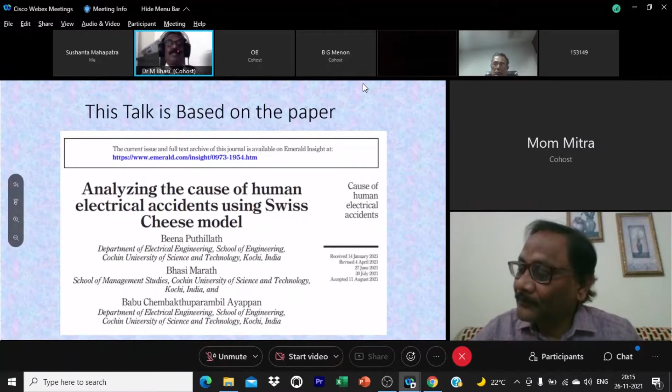Let me just take you through the background, though it is known to you, just to till the soil before you sow the seed. Accidents have been a major concern for a very long time. Though in earlier days, accidents were always attributed to the zone in which it was involved. I repeat, when you study accidents, you just focus on the zone where the accident occurred. Now, accidents are understood to have deeper and wider causes, even covering practices in society and industry.

Studies on electrical accidents reported in literature have mostly focused on the causes in the proximity of the accident and most of them have not taken a wider view of the phenomena leading to the accident. In industrial situations, even the causes of the accident in the proximity of the site and time were not in the control of the people there at that time and place.

I repeat, when the accident is taking place, the things which happened there were not within the control of people there. So just by studying things in the proximity, which people at that point of time could not control, it will be difficult to bring accidents to very low levels. Decrease of accidents can happen, but eliminating accidents, or bringing it like we did in quality management, zero defect, zero accident, bringing it to those levels will be difficult.

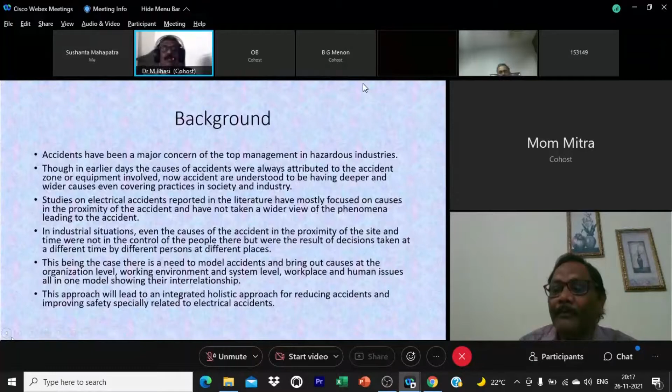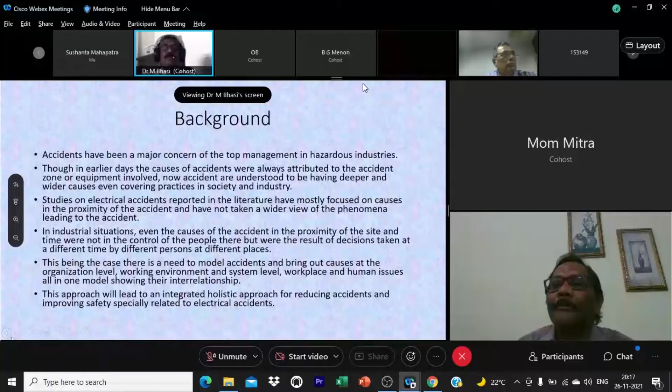Because many things that happen there were a result of decisions taken at a different time by different people at different places. This being the case, there is need to model accidents and bring out the causes at the organization level, working environment and system level, workplace and human issues, all in one model, showing their interrelationship. This is the thought which led us to this work. So we are trying to understand and depict the causes of electrical accident at these multiple levels, not just the causes which occur in the proximity of the accident.

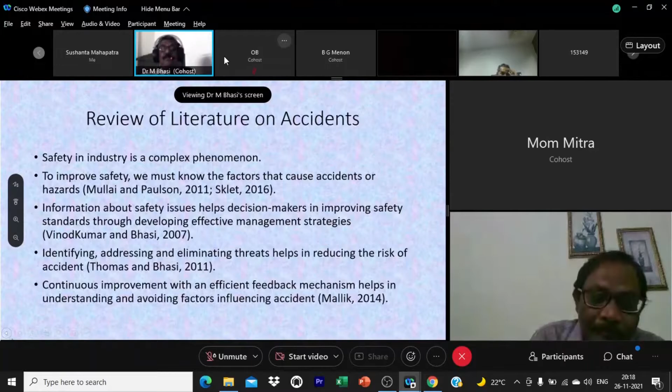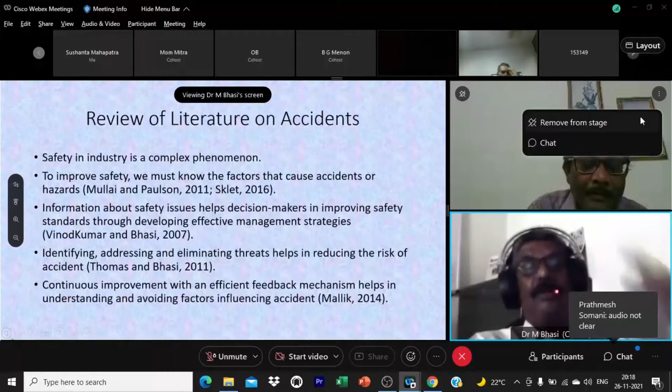A review of literature with this focus revealed that, first, safety is a complex phenomenon, no doubt about it. And the approach which has been used from long back to improve safety: we must know the factors that cause accidents or hazards and try to act on them. Information about safety issues helps decision makers, meaning if safety issues are studied and information is generated, it helps in improving safety standards to developing effective management strategies.

Identifying, addressing and eliminating threats helps in reducing risk. Then continuous improvement, an efficient feedback mechanism in this area helps in improving the system and reducing accidents. So the philosophy of TQM and that type of philosophy applies here also. You have to continually improve and not just get satisfied with one.

There are many theories which explain, which have been used to model. And I saw a recent paper, which is an excellent paper and has discussed accident causation models for 100 years. This is a very good point to start with. Let us look at some of the theories. We have selected certain theories not based on importance, but based on suitability for our thought process. That is hierarchical arrangement of causation.

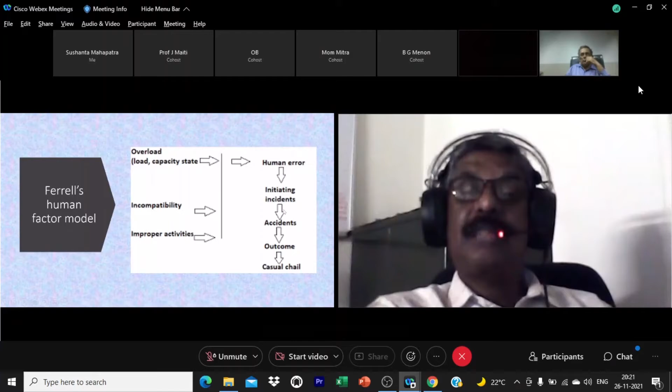Then there is Ferrell's human factor theory, which again just spreads out the whole factors there. It looks at overload, capacity, incompatibility, improper activities, resulting in human error, initiating accidents. Accidents happen, outcome is there, and causal chain is there.

Focusing on the human factor. There is also Petersen's accident-incident model. The accident-incident model covers causes and subcauses for the unsafe act and unsafe condition. So we divided the whole thing: both unsafe act and unsafe condition are necessary for an accident to occur. An unsafe act in a safe condition will not result in an accident. An unsafe condition without an unsafe act, again, the accident doesn't happen.

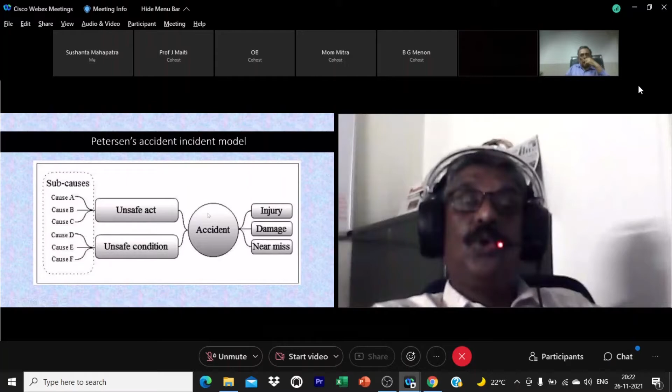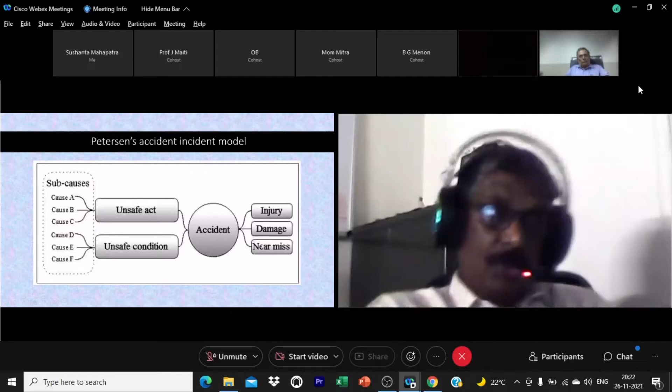So an accident has two parts, both unsafe act and unsafe condition, for an accident to occur, which may cause injury, damage, near miss, and so on. Incident or accident.

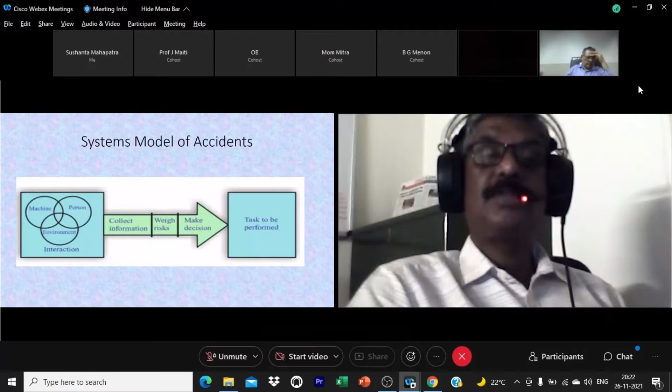The system model of accidents considers the whole machine, person, and environment and their interaction as a system. And the model suggests that we need to collect information, weigh the risk, make a decision, and then do the task. This is a very broad model. Systems models are broad, at the broadest levels.

The Reason's Swiss cheese model is what we have used, because the hierarchy is made by top level decision makers, managers, designers and planners, line management, operation and maintenance, and the technical faults and conditions. So in the Swiss cheese, like in the cheese, there are holes. In each slice of the cheese, there are holes in random positions. In the next slice also there will be holes in some random position, and so on in all these cheese slices.

If you are using a laser pointer, for example, and pointing through a hole, only if there is a hole in a straight line in the cheese slice next to it and so on, only if all these holes are aligned, then the light will reach its destination, or the accident. Meaning, a hole is a problem, an issue, or an unsafe condition, so to say, or unsafe act. So only if these holes are aligned does the accident take place. If one of the cheese slices does not have holes and is impervious, then the accident will not happen. So this is the view of the cheese model.

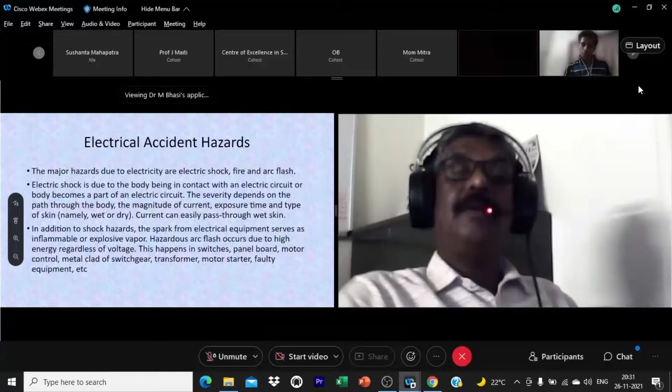Electric shock is due to the body getting in contact with an electric circuit, or the body becomes a part of a circuit. Severity depends on the path through which the current goes. If it goes through your head, heart, and things like that, there are more problems. Magnitude of the current, exposure time, and the type of skin, wet or dry.

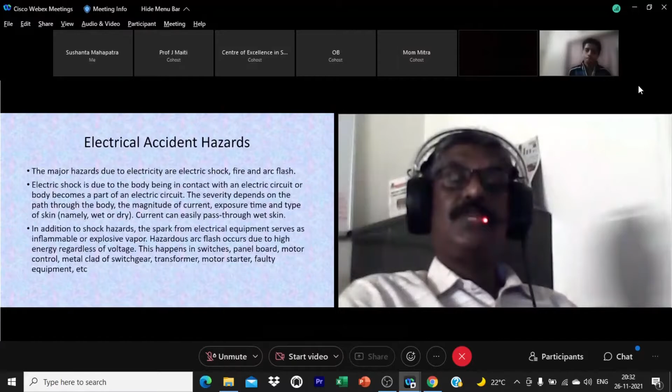In addition to electrical shock hazards, a spark from electrical equipment serves to detonate an inflammable or explosive vapor. Hazardous flash occurs due to high energy, regardless of voltage. This happens in switches, panel boards, motor control, metal clad switchgear, transformers, motor starters, and many faulty equipment.

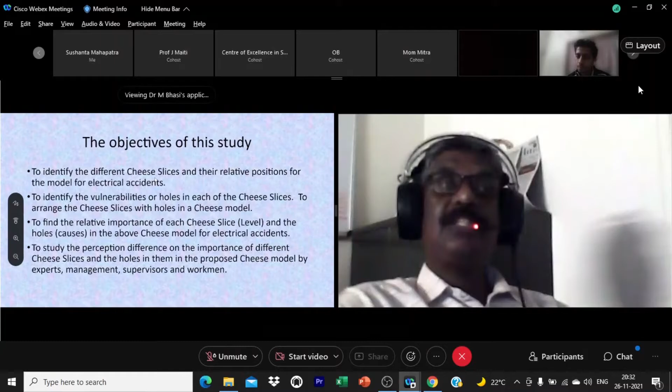The objectives of the study were to identify the different cheese slices, what will be the levels of aggregation, and in these aggregated levels, what will be the factors which come. Both these had to be found out. And we wanted to find out from the field, because those are the people who know this better.

To study the perception difference on the importance, because we planned to gather this from a survey of people involved. Survey responses are always based on perception. So we wanted to survey different people. We wanted to survey workmen, supervisors, people like executive engineers, middle level, and then the top level people, and also have a panel of experts who will give their perception. So experts, management, supervisors, and workmen, all these categories of people were surveyed. And we wanted to find out.

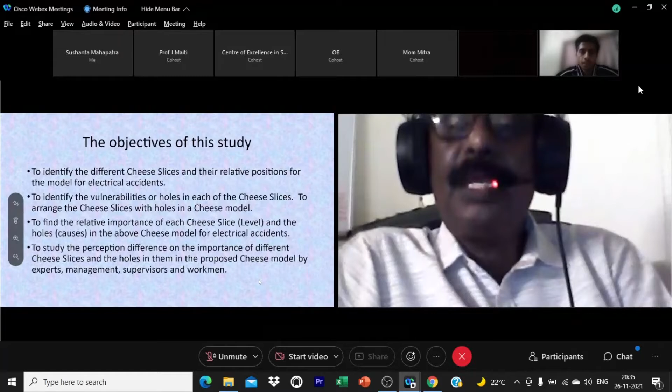Shobik, but who is sending this? Actually, sir, some participant usually sends. Why? That I don't know, sir. All the participants, we have requested not to send anything. Yes, sir. If you have any queries, anything, at the end of the lecture, please ask. Okay, the presenter knows which link is to be clicked. If required, they will do it. Okay, Professor Bhasi, sorry for the disturbance. That doesn't matter. Let me see. I have stopped sharing, and now I will share once more.

For me, it has got stuck. I'm resharing, but then again, my controls are, it's working. Sir, due to some network issue, it may be delayed. No, it's working now. It's working. It's working, yes. So let me

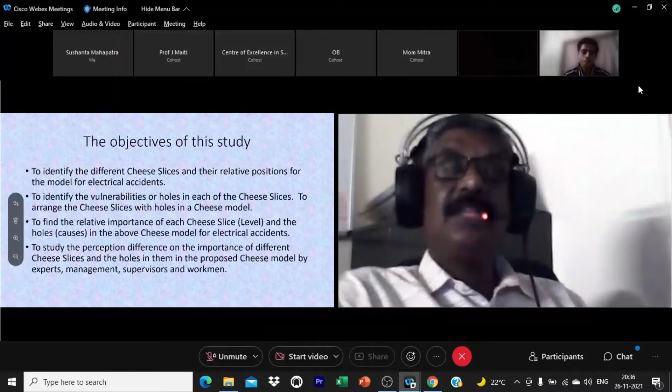To study, therefore, we try to gather the perception of experts, management, supervisors, and workmen, and try to analyze and understand the difference in perception also. So the design and the methodology used in this study was that we

used a Delphi kind of expert survey, conducted to find the cheese slice level. From literature, we took a large number of slices and the causes also, and gave this to experts, and through multiple rounds in an expert Delphi exercise, we converted them into slices and the holes in the slices. Holes are the issues pertaining to that level.

This thing which was obtained from the Delphi exercise with the experts was converted into a questionnaire, and it was distributed among 3 groups: managers, supervisors, and workmen. From assistant executive engineers above were called managers. Supervisors were the direct supervisor and the assistant engineer or the supervisor itself.

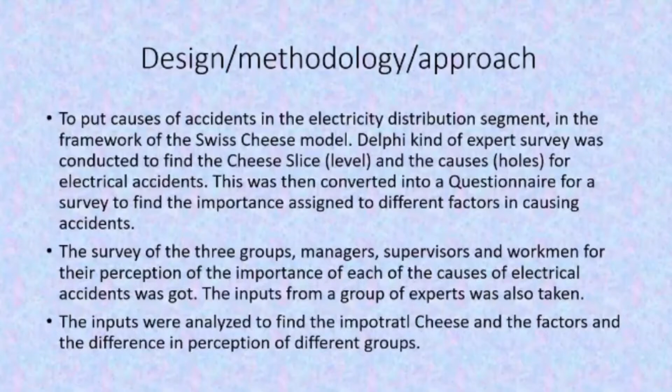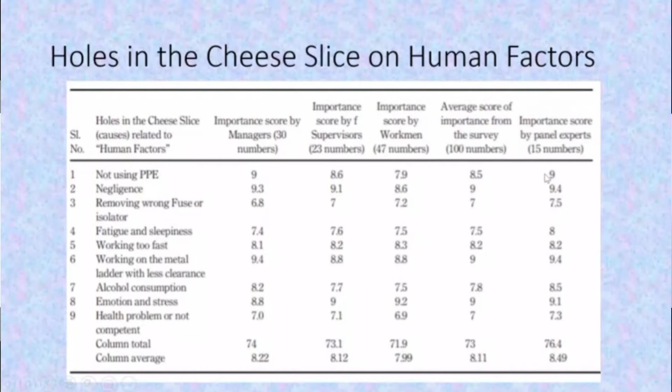On work-related issues, the biggest thing which came is improper earth, as felt by managers, but defective equipment is what supervisors have told, workmen have also told, and experts are also saying. But this defective equipment, wear and tear, replacing it is the responsibility of the managers. They are not giving too much importance to it. And why it is not happening is evident from this score. They are not seeing it as important. That is why we are not rectifying this in practice. So in this case also, we saw gaps of understanding and prioritizing, which have resulted in a condition where more accidents could happen.

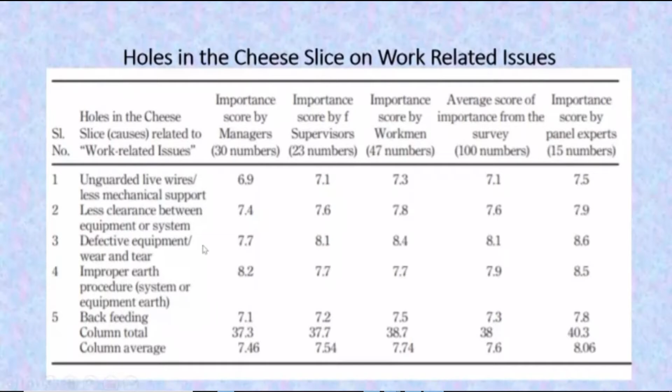And you know, people dealing with electricity get most work just after a storm or during bad weather. During very good weather, they have very little work because nothing goes wrong. So their work comes, especially for distribution and supply maintenance personnel, during rain. And that is when they are exposed to these dangers and hazards.

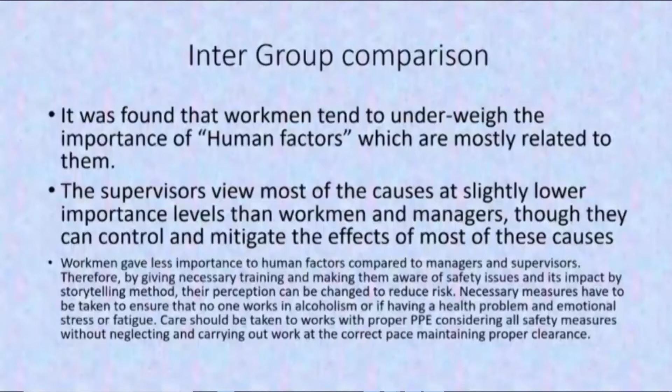Human factors are perceived to contribute maximum to electrical accidents. This is by taking the total of the points for each slice, followed by work culture of the organization. Work-related issues and working environment and system have lower perceived contributions to electrical accidents.

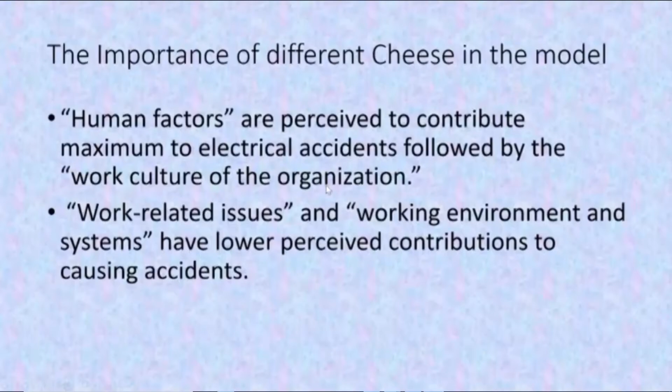Efforts to plug the holes in the cheese: work culture of organization. First plug the holes or reduce them for factors which have high scores and go on to lower score factors: working environment and work-related issues. Because many a times it is seen that when you start to plug work culture in an organization, you have to do things at the other levels also, working environment and system and work-related issues also.

The lack of knowledge, lack of SOP, and things like that are very evident from the data collected. So effective training for safe work practices, safe knowledge, and closer supervision also. Closer supervision definitely will go a long way to plug holes in the cheese model on human factors. Work culture of an organization contributes more to electrical accidents compared to working environment and systems.